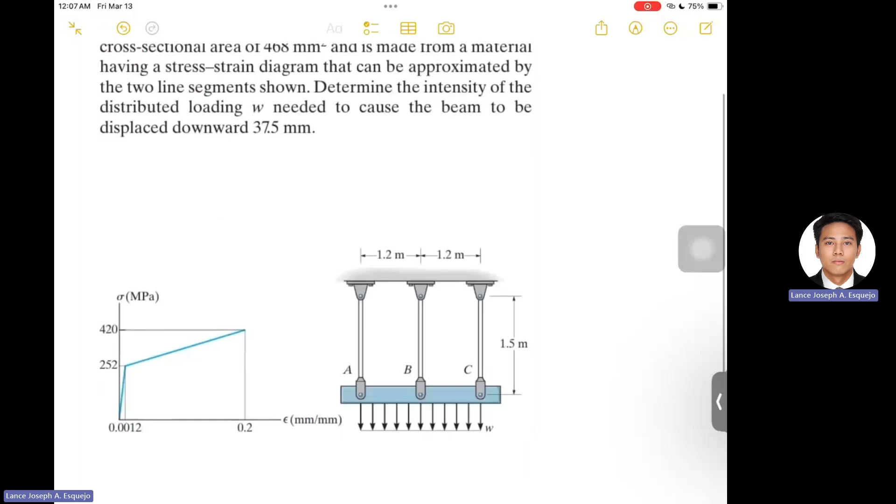Sample problem for Mechanics of Deformable Bodies, Module 4, under axial load. The distributed loading is applied to the rigid beam, which is supported by 3 bars. Each bar has a cross-sectional area of 468 square millimeters and is made from a material having a stress-strain diagram that can be approximated by two line segments shown. Determine the intensity of the distributed loading W needed to cause the beam to be displaced downward 37.5 millimeters.

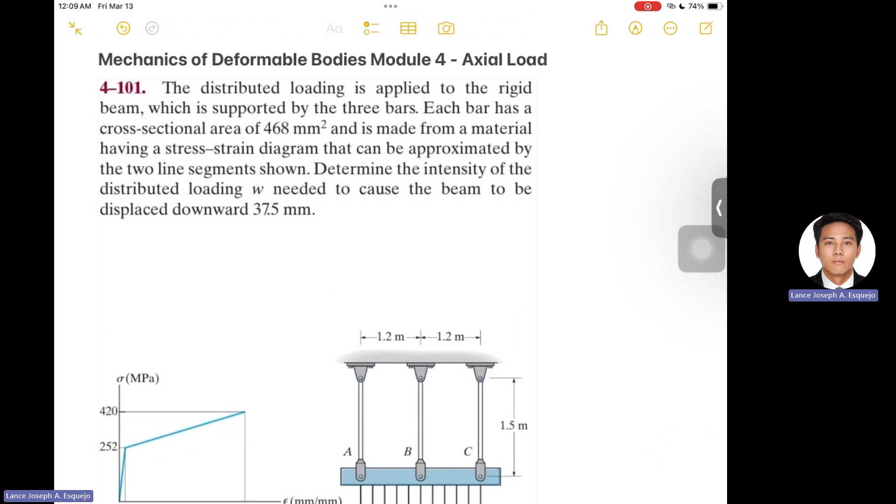Focusing first on the statement that the beam is a rigid beam. If this beam is rigid, its deformation is negligible. So if point A goes down by a certain distance, that will also be equal to the distance point B and point C go down.

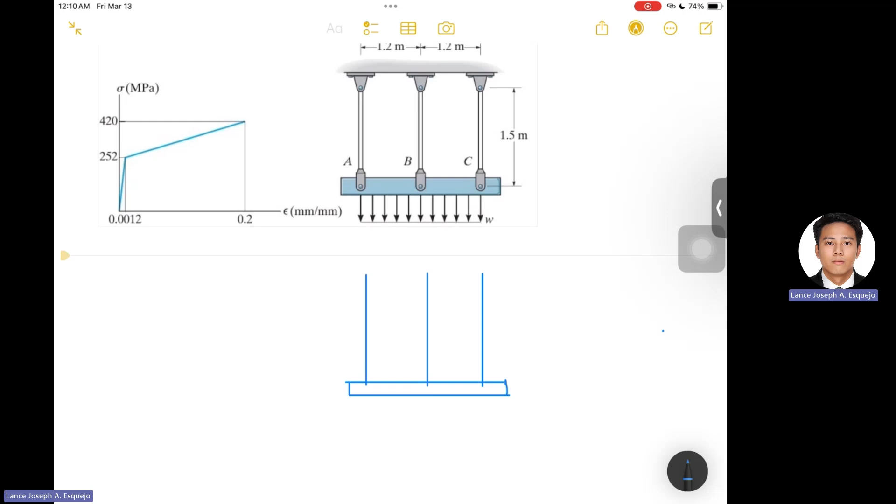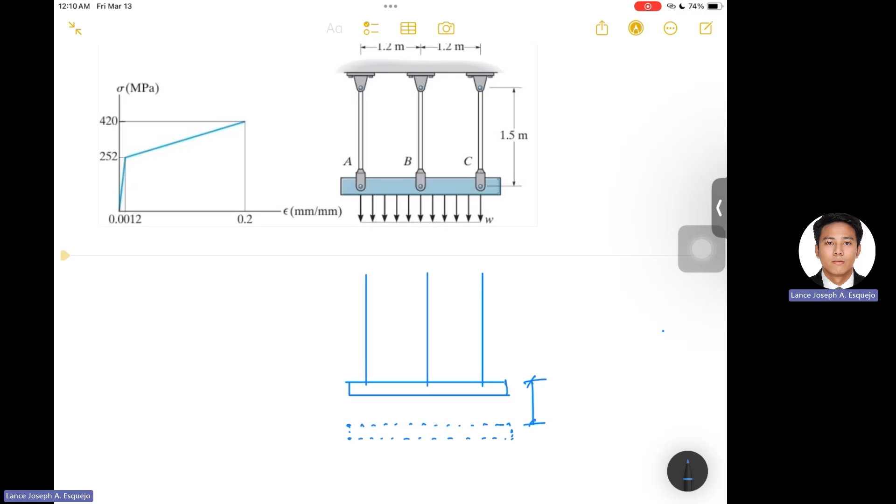Let's draw it like this. This is the first rod, second rod, and third rod or third bars. We have the beam here. If the beam goes down by a certain distance, for example this is the beam after applying the load W, and this is the distance, which as stated in the problem is downward 37.5 millimeters.

So this is A, this is B, and this is C. If the rigid beam goes down by 37.5 millimeters, that means all points A, B, and C will go down as well, and that will also be considered as the deformation of each bar.

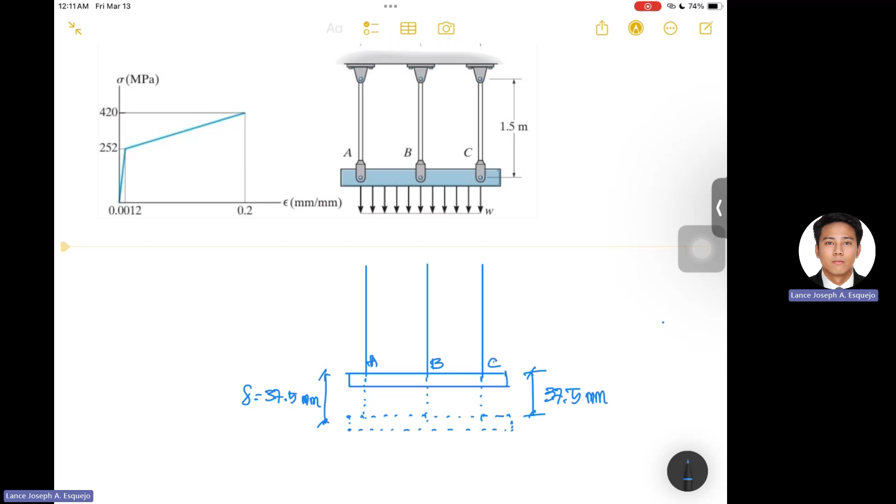That means bar A, bar B, and bar C will extend. And since they extend by the 37.5 millimeters downward, that becomes their deformation as well. So we have a deformation of 37.5 millimeters for each bar.

Now that we have the deformation equal to 37.5, we can compute for the strain of each bar. Strain is equal to the deformation divided by its original length. Deformation is 37.5 millimeters and the original length is 1.5 meters, so we can directly compute for this strain that's equal to 0.025 millimeter per millimeter.

Looking at the stress-strain diagram, our computed strain is somewhere here, 0.025, and the corresponding stress here, let's call it sigma. For us to compute the value of sigma, let's first compute the slope of this line.

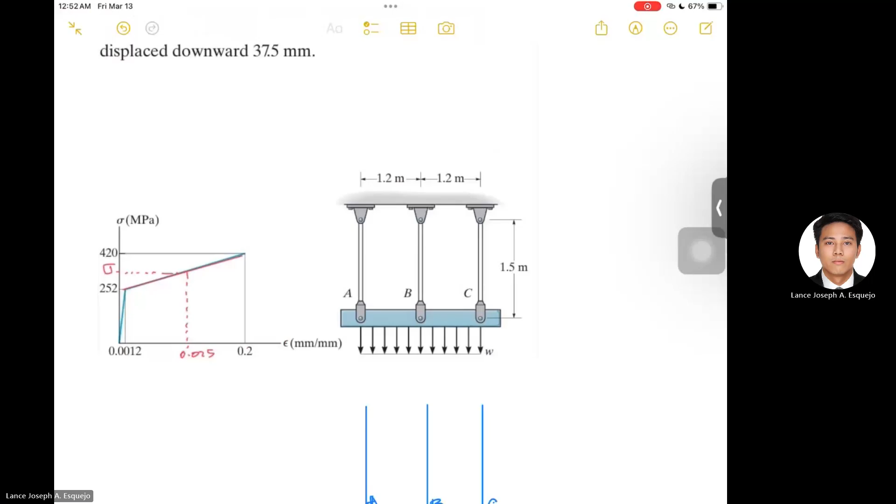To compute for the slope of that line, we just need to compute the difference of the stress and its corresponding strain. Let's call that slope E1, since that's also the modulus of elasticity.

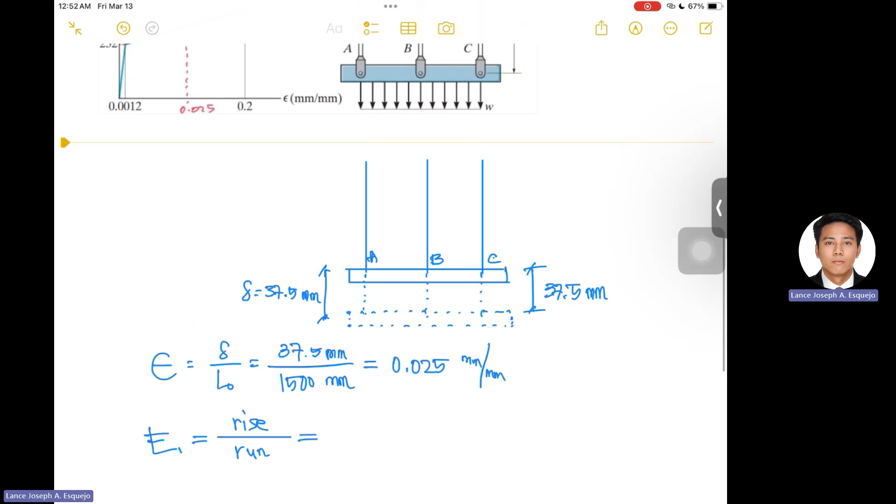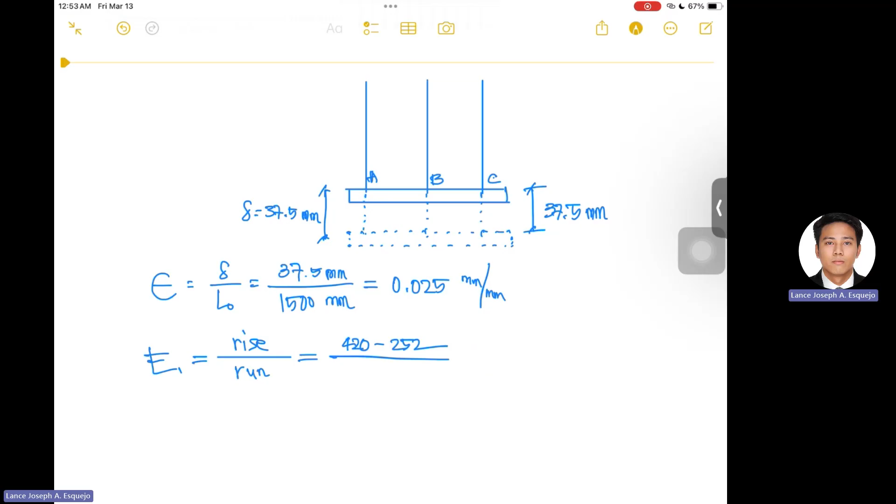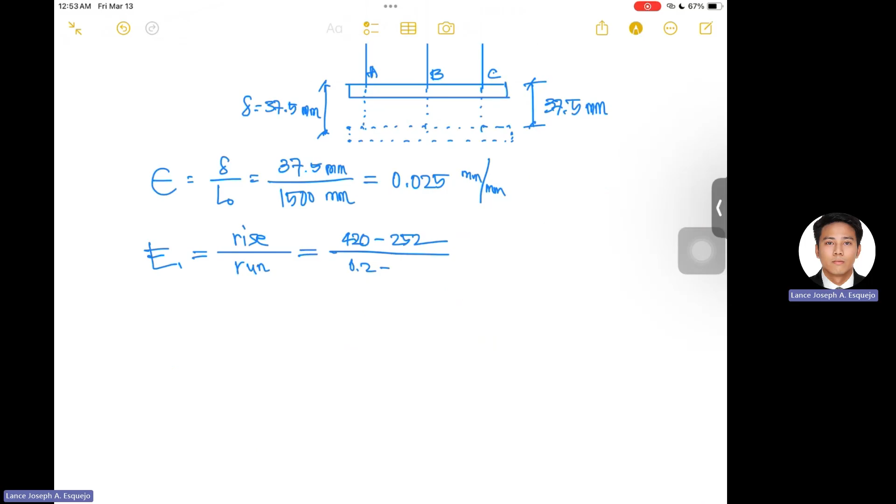Now E1 is equal to rise over run, since that is a straight line. The rise is the difference of 420 and 252. For the run, the difference we need is 0.2 and 0.0012. Then we can compute for the slope of the line, which is equal to 845.07 megapascal.

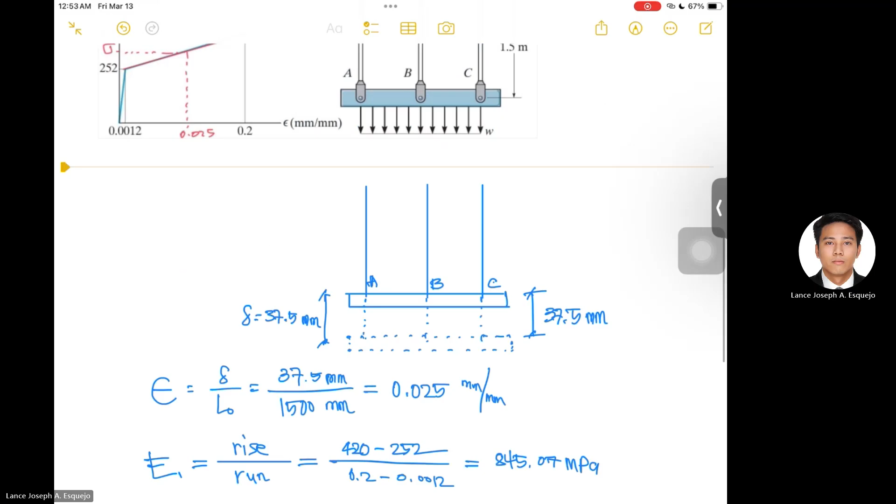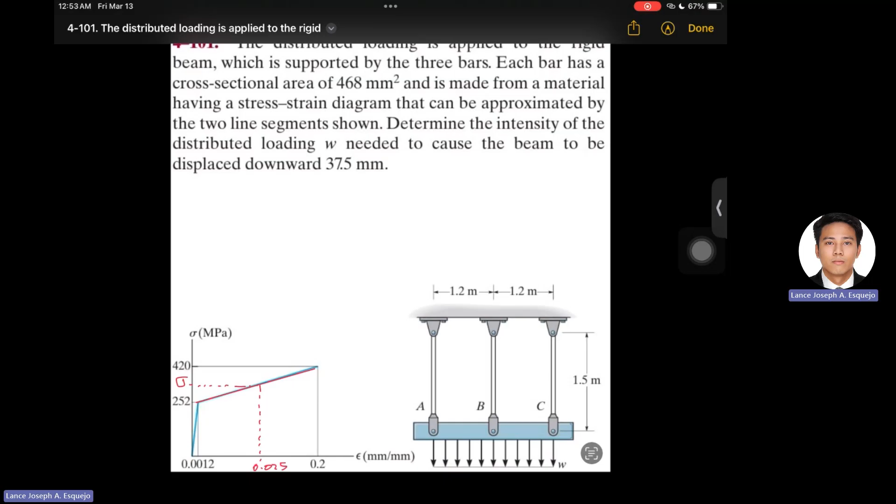So now we have the slope of the line, which is equal to 845.07 megapascal. From there we can compute for sigma. The slope here is E1. From this point, with a strain of 0.0012 up to 0.025, let's call it X. And from this point, 252 up to this point, let's call it Y. So from here we formed a triangle.

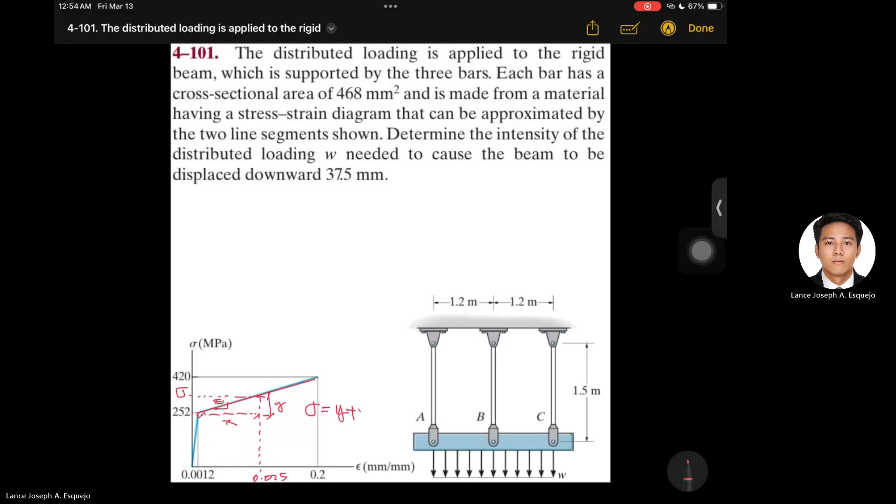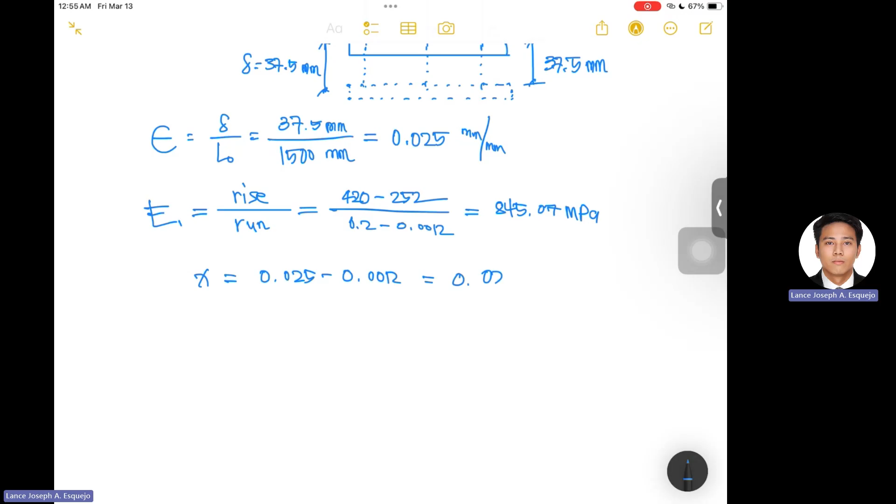And from here we can see that the value of sigma will be equal to Y plus 252. Let's first compute the value of X. The value of X is the difference between 0.025 and 0.0012, and that's equal to 0.0238 millimeter per millimeter.

Since we have already computed the slope E1, and that's also equal to Y divided by X as shown on the graph, we can now compute for the Y value. Using this equation, you can see that our Y value is equal to E1 multiplied by X. E1 is 845.07 megapascal and X is 0.0238 millimeter per millimeter. So Y value is 20.113 megapascal.

Then we can compute for sigma, which is Y plus 252 as shown in the stress-strain diagram. So sigma now is 20.113 plus 252. Sigma is equal to 272.113 megapascal.

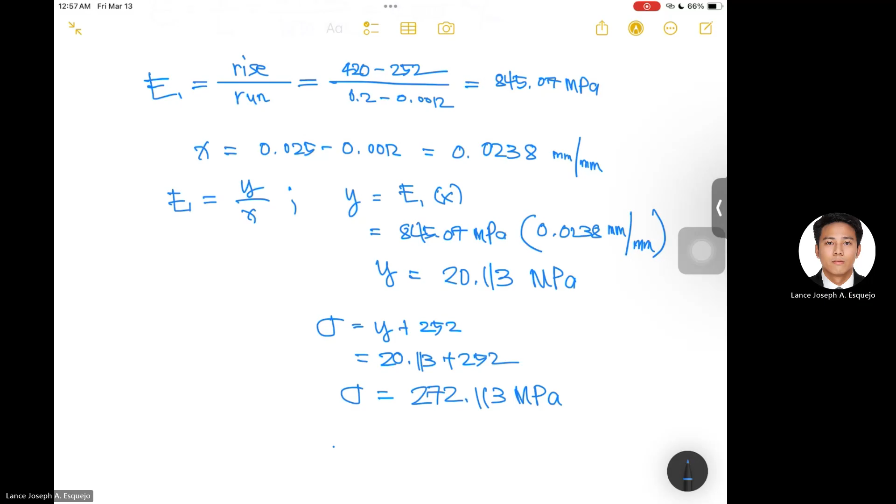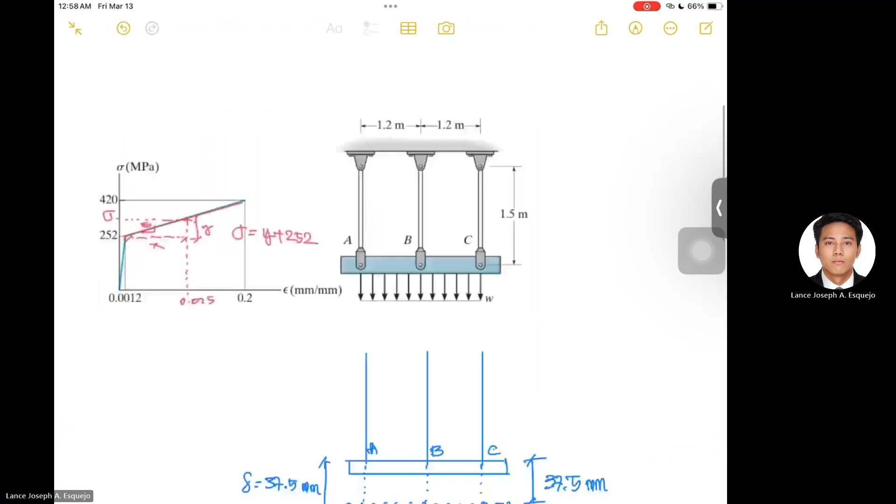Since we've computed sigma, we can now compute for the force of each bar. Let's call force F as the force for each bar. Since we have already computed sigma and we have the area of each bar provided earlier, sigma is 272.113 megapascal and area is 468 square millimeter. Force for each bar is 127,348.728 newtons, or we can just write 127.349 kilonewtons.

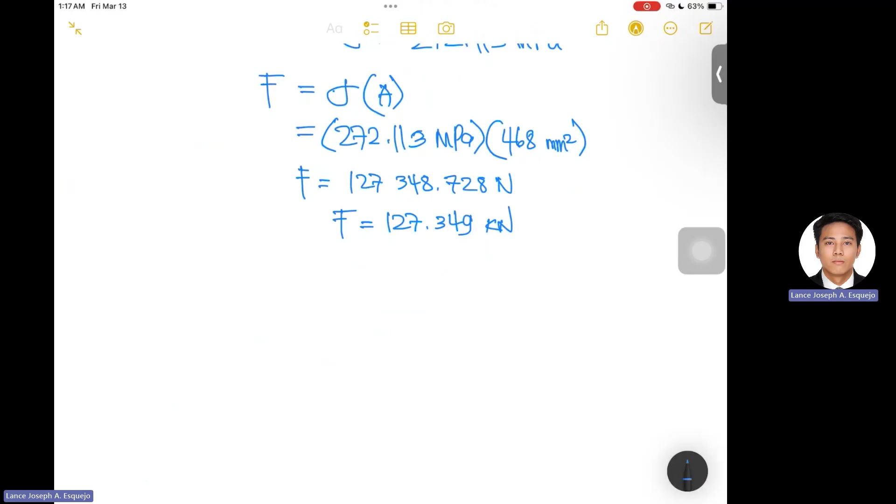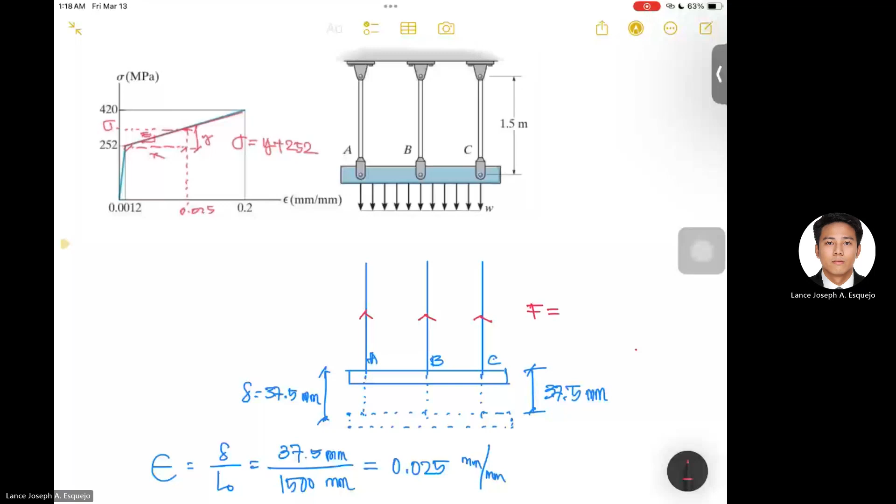Now that we have computed the force F, we can go back to the figure. This one is upward, this one is upward, and this one is upward. And we have the value F equal to 127.349 kilonewtons. This one is F, F, and F.

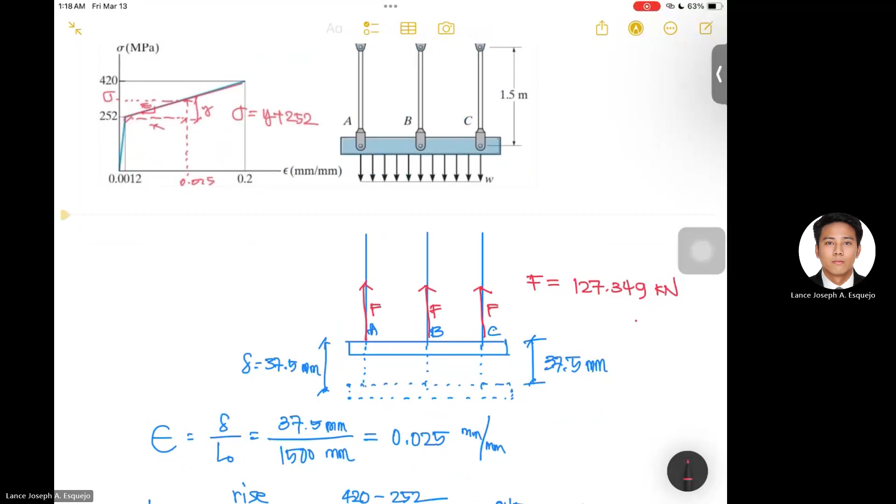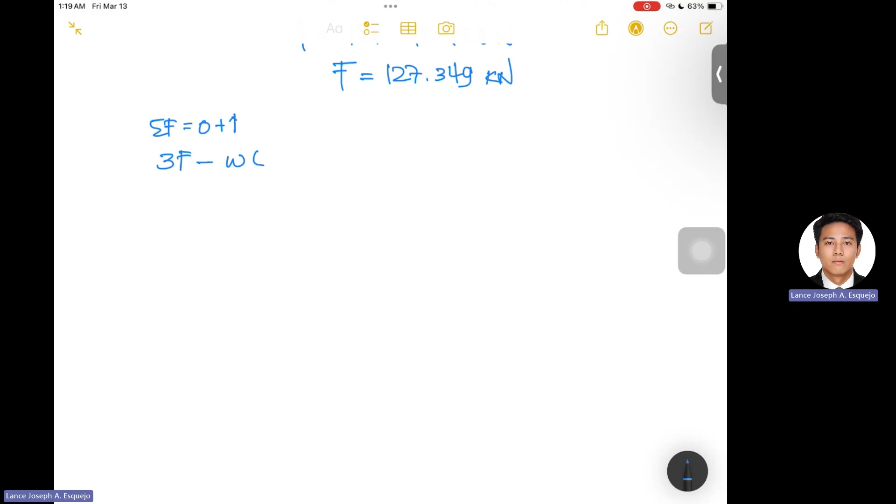Taking summation of forces vertical equals 0, positive upward, we have 3 times F minus the downward load W multiplied by the length, which is 1.2 plus 1.2, so that's 2.4 meters, equals 0. Substituting F, we have 3 times 127.349 kilonewtons minus W times 2.4 meters equals 0.

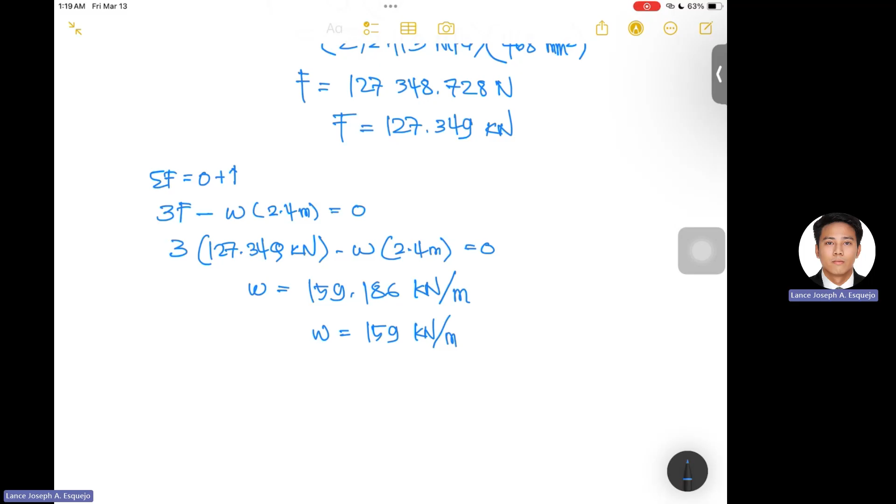So now W is equal to 159.186 kilonewton per meter, or we can just write W equals 159 kilonewton per meter. So that's it. Thank you for listening.